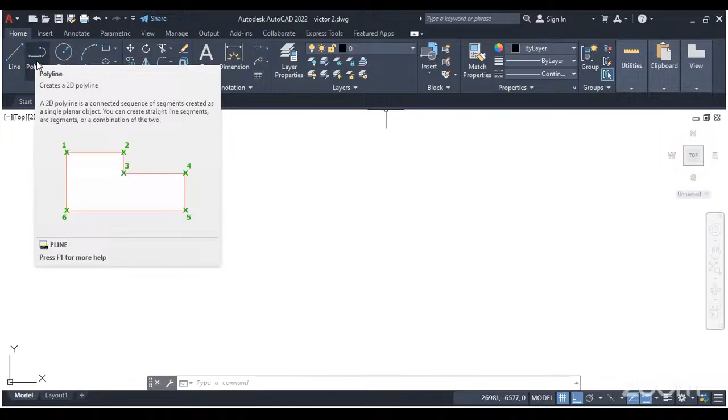After that we have what we call our ribbon. If you recall from our last class, starting from this drawing panel down to this view, they are all our ribbons, but now being broken into different panels. We have the draw panel, the modify panel, the annotation panel, the layers panel, and the rest of it.

Then we moved to what we call viewport controls, the view control, and the visual style controls. The viewport, if you leave your mouse around it, the definition will pop out for you. It says it provides access to multiple viewport configurations, several viewport tools, and the display options of the current viewport in a layout. Simply put, it gives you several positions for you to view your screen.

So you can have double screen, more than 2, 3 screens, or 4 screens. So we can try it. Click on it, then go to viewport configuration list, where you can see 2 vertical, because we are on single. You have 2 vertical, 2 horizontal, 3 rights, and the rest of it. So you can click on any one you want.

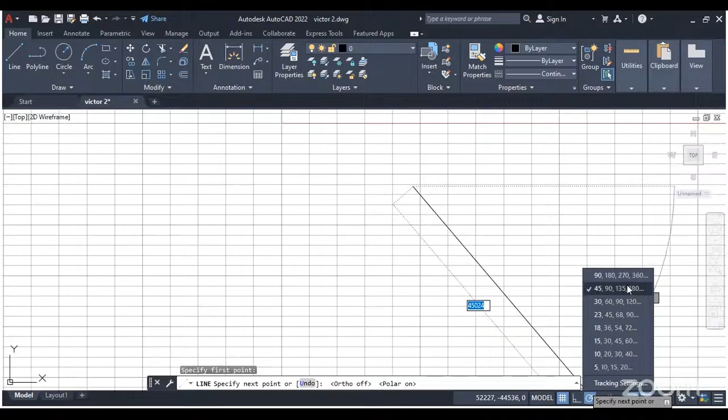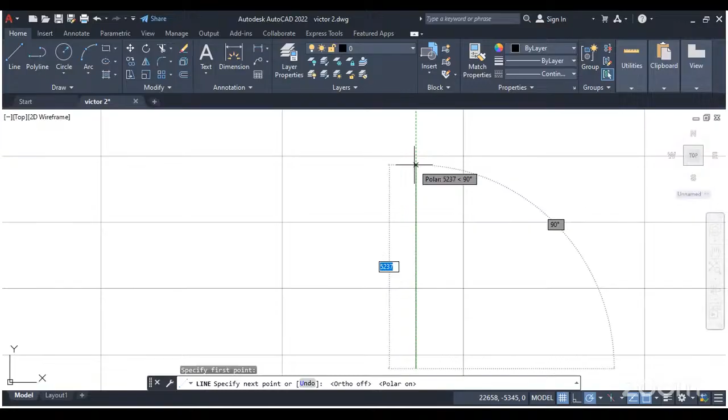Okay, let me turn it on. If I turn it on and move my angle to 45 degrees, you can see it. Let me zoom out so you see it properly. You see this other side is tracking it at 135, and you check, you see 135. The track is also tracked at 90. This is 180, it tracks at 135, it tracks at 90 degrees. When it's tracking, you see the green dotted lines. You can see the green dotted lines at it, and if you check the angle, you see it at 90 degrees. So that's for your polar tracking. Once it's turned on, it will be activated.

We also have what we call isometric drafting. This is used to change the position of your grid lines. If you turn it on, you see...

Oh, can you guys hear me? The time is 9 o'clock p.m. Can everyone hear me? Yes, we can hear you. We can hear you. Okay.

So if you turn it on, you see the grid line, when the direction of the grid line has changed, it also has a different direction. This is how this one is. So that's for your isometric drafting.

Then we have object snap tracking and object snap. The two of them actually work hand in hand. The object snap tracking is used to track the object snap. So now what is object snap? Object snaps are kind of endpoints or different points in an object. You can see we have endpoints, midpoint, center, geometric center, quadrant of a circle, intersection, extension. So these are different points of an object which can be snapped using object snap.

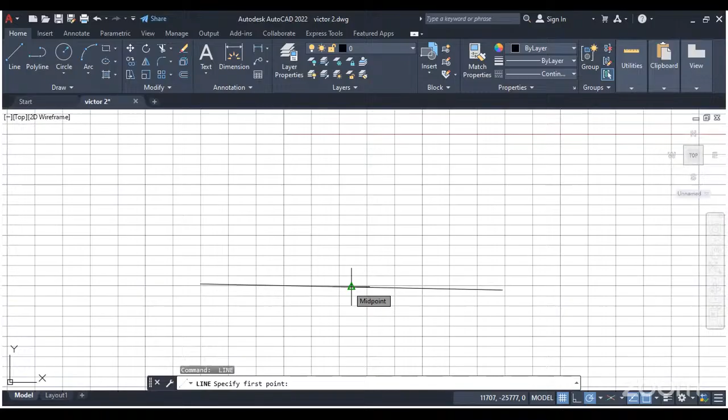Now the object snap tracking. This point that I have snapped, I can track it. I can trace it to another direction. Once I snap it like this, I can trace it to another direction and draw something else at that particular point. So that is what the object snap tracking does - it tracks the object snap.

Okay, I hope you understand the difference. Then we have line weight, which shows the thickness of a line. If I was to activate it, a line of 100, and this is not turned on, no matter how I increase the thickness of the line, it will also not show.

Until this line weight is turned on, the thickness will still be neutral like this. Then we have what we call workspace switching, which is used to switch from your 2D drafting and annotation to 3D modeling. And then this is your customization. So everything here can be customized. Everything showing here are the ones that are being ticked, so if there are ones that are not necessary, you untick it. Not as if they are not important, but it's just going to be too much around here.

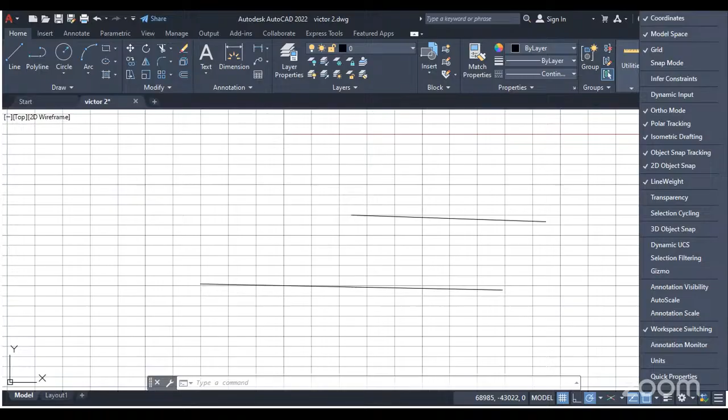Okay, so that is basically what we're being taught on Monday. And then we treated some examples. And we talked about our drawing tools. We talked about the line tool, the polyline, the circle, and the arc, the rectangle, and the polygon.

I think that was where we stopped in our last class, whereby our line tool says once you activate it, specify your first points. Remember what I said, that your command bar shows you step by step on what to do. It tells you what to do after activating a command. Now I've activated my line command, and now it's telling me to specify my first point.

So I can specify any point of my choice, and automatically it will tell me what's next to do, which is to specify my next point. So I specify my next point, and it will still continue telling me to specify until I'm done. When I'm done specifying, I will just have to click on escape.

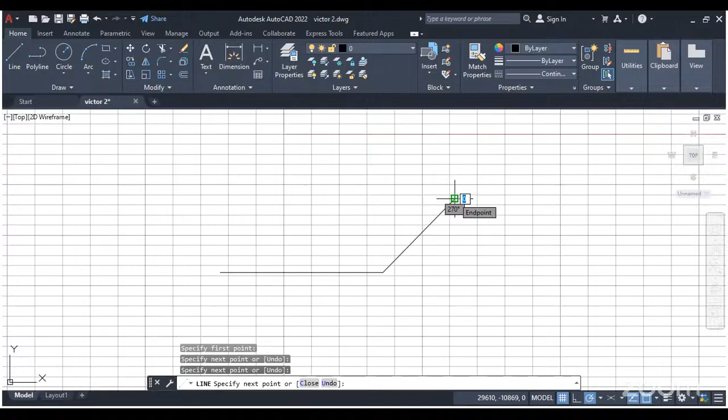Then we talked about our polyline, which is the same as our line tool. The only difference is the different entities. Like if I should draw a line like this and I escape, you notice that the lines are separate entities. It can be highlighted or edited one after the other. But the polyline now, they are together. That's the difference between the polyline and the line tool.

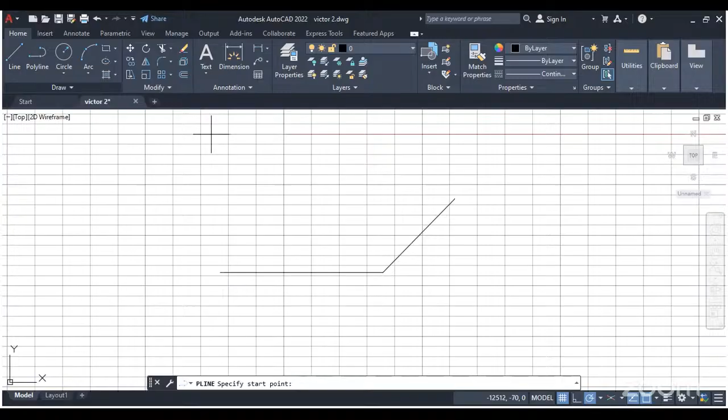Then we treated on circle, whereby we have different ways and different patterns of drawing your circle. You have your center radius, you have your center diameter, you have 2 points, and you have 3 points. So I think we treated on center radius. So depending on what parameters were given to you, if you are given the center of a circle and the radius of a circle, you can go ahead and use center radius.

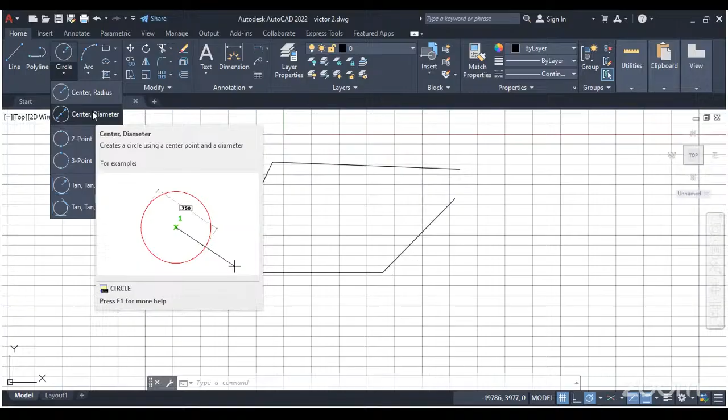If you are given the center of a circle and the diameter of a circle, you can go ahead and use center diameter. If you're just given 2 points directions, let's say for instance they said you should use this point and this point to create a circle, you can go ahead and use 2 points. So let's just use one of it. Let's say we have 2 points. So you click on the first point, click on the second point, and automatically we've created our circle.

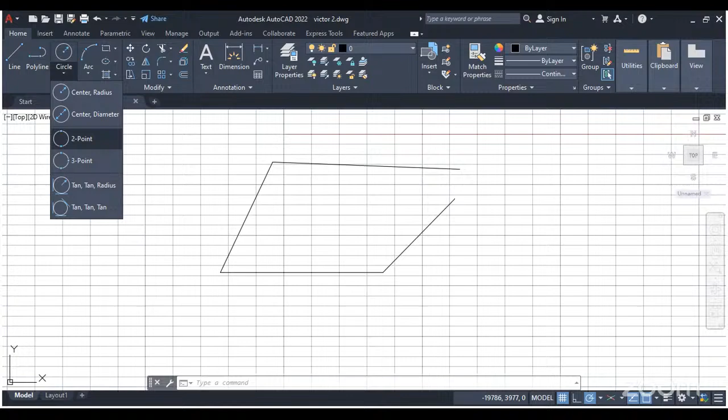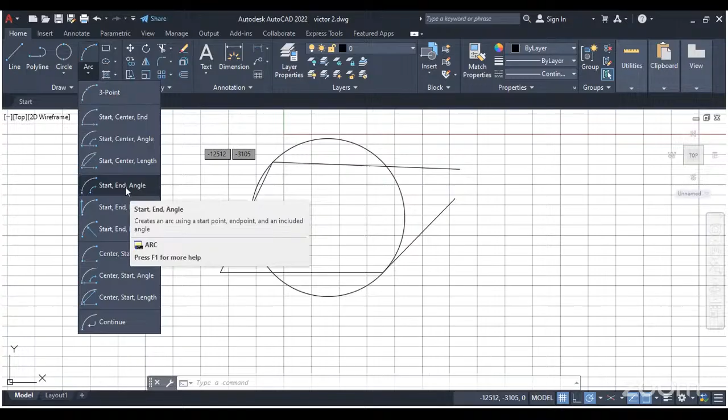Then we move to our arc. Still the same, we have different ways of drawing our arc. We have the 3 points arc. We have start center end, start center angle, start center length, start end angle, start end direction, start end radius, start center, start end, center start angle, and the rest of it. It just depends, like I said, on the parameters given to you.

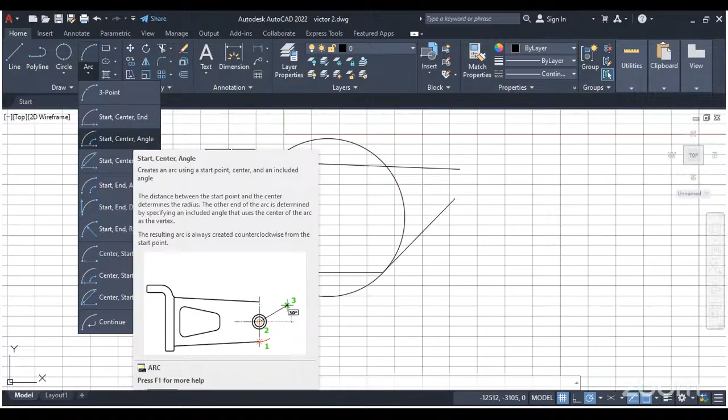Now let's use the start center angle. Let's just say this is our starting point. Remember, follow your command bar. It says specify your start point of arc. Let's say this is our start point.

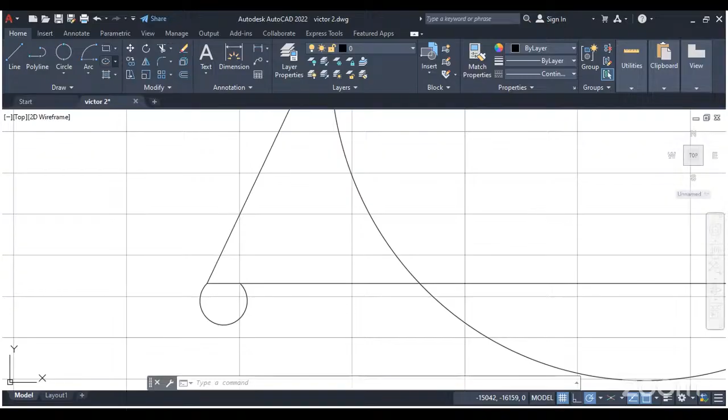Then we also treated rectangle and polygon. We treated rectangle. Once you click on it, it says specify the first corner point. You specify any corner point, specify the second corner point, and automatically you've drawn your rectangle.

So then we treated polygon. Now we have 2 types of polygon: the inscribed polygon and the circumscribed polygon. So if you leave your cursor, the definition will pop out. It says you create an equilateral closed polyline. You can specify the different parameters of the polygon, including the number of sides, the difference between the inscribed and circumscribed options is shown. So the inscribed now is the polygon that is inside the circle, meaning in, with the word inscribed.

The inscribed polygon is inside the circle, and the circumscribed polygon is outside. But they are both the same numbers used to create them. So if we use a radius of 20 for both, the difference will be shown.

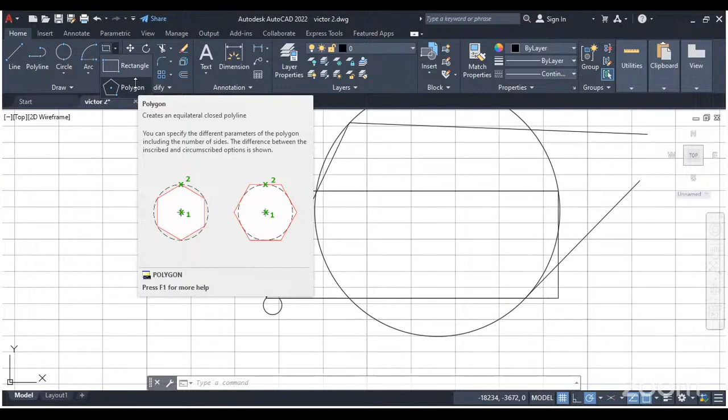So let's try it. Let's replicate what is shown here. We draw two different circles.

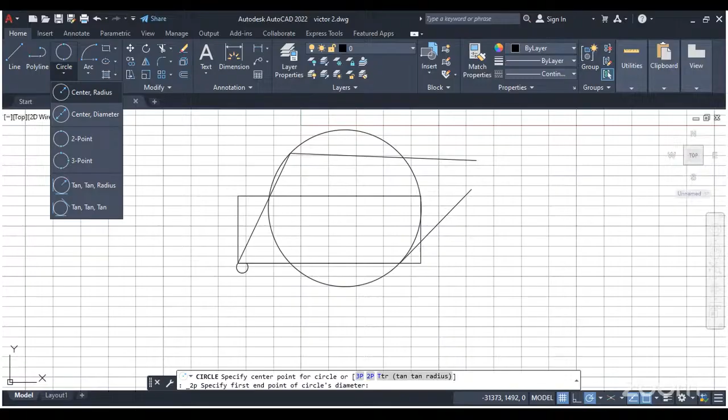Let's use center radius to draw this, since we are working on radius. We specify our center and then our radius. Let's say our radius is 4,500, then press enter. This is the first circle. Then for the second circle, still using center radius, specify your first point and the radius as 4,500, then press enter. So these are two different circles with the same radius.

Now we go to our polygon and activate it. Once activated, the first thing in the command bar is polygon, enter number of sides. Let's say 8, and we press enter. Now it says specify center of the polygon, and we are going to use the center of our circle as the center of our polygon.

Then you click on it. The next option asks if you want it inscribed or circumscribed. We go with the first option, inscribed. Now the next thing is to specify radius of the circle.

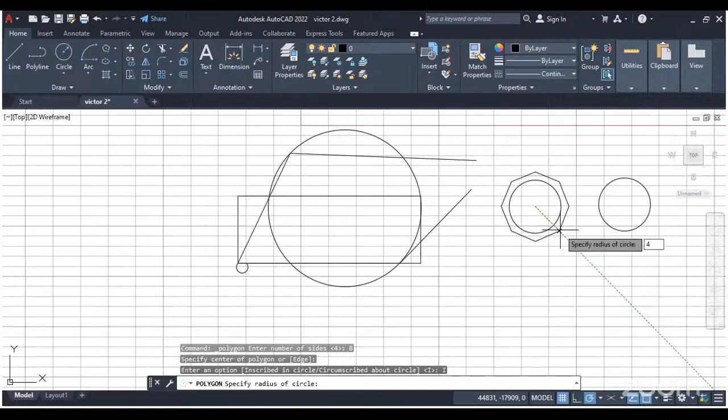Remember, we used 4,500 radius to draw our circle, so that's the same radius we use. 4,500, then press enter. So you can see we activated the inscribed polygon, and the polygon is inside the circle using the same radius. Now let's still use the same radius to activate the circumscribed polygon.

The first thing after activating is to select the number of sides. It's 8, you press enter. For center, you use the center of the circle. Remember, the center appeared automatically because the object snap is turned on, and the center of a circle is being activated.

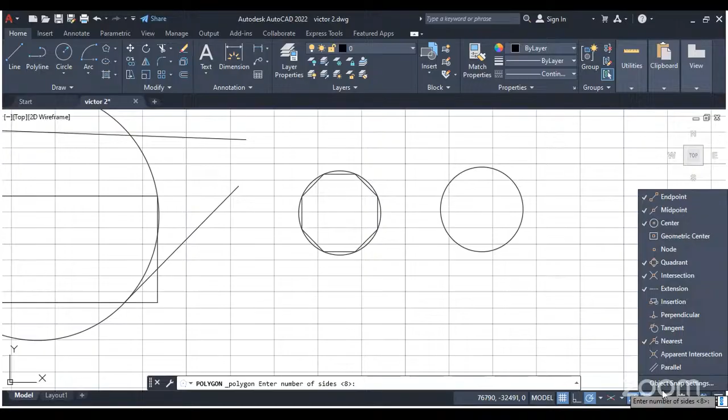If I turn this off, even if object snap is on but I turn the center snap off and activate my command, I will look for the center, revolving around this circle, and it won't show. I will then start doing calculations about it. So I have to turn the center on, and my object snap has to be on. Now you see the function of object snap—it's so easy to get the center of a circle, the quadrant of a circle, and the rest. Very, very easy.

Once I revolve, I activate my sides first, then specify. I haven't specified the center yet, let's start again. Activate my sides. Once I revolve around it, automatically the sign of center will show. If I move close to it, you see it's the center. So I specify my center as the center. Then we use circumscribed, and specify radius of circle, which is 4,500, then press enter.

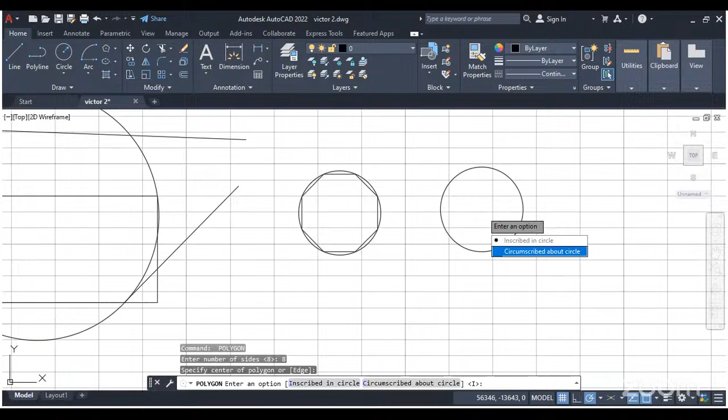Now you see it—the polygon is outside the circle, which is circumscribed. I hope that was pretty clear.

Now we move on to center ellipse. We have different ways of drawing our ellipse, just as we have different ways of drawing an arc or a circle. Using your center, you can draw your ellipse, or using axis endpoints. Then we have something different, which is the elliptical arc—it's an arc but in the shape of an ellipse. So we are going to try the center method and the elliptical arc.

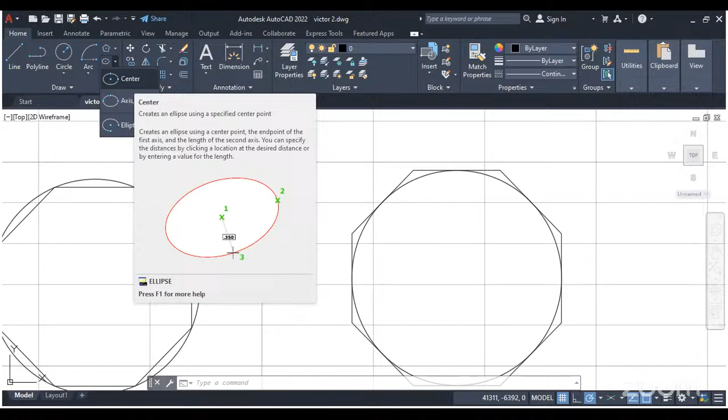So it says create an ellipse using a specified center point. Clicking on it, select and specify the center of the ellipse. Let's say this is our center. Select the endpoint—this is our endpoint, and then the distance, which shows the shape of it. Let's just leave it here. You have automatically drawn our ellipse.

Now, using the elliptical arc, you activate it. It says specify axis endpoints.

Okay, you can specify any point as you ask, except when you've been given a specific instruction. So you specified the first axis points. Now it says specify the other endpoint. Let's say these are the other endpoints.

Now the distance, which is the shape of the ellipse. This is our shape. Now it says specify the angle. From where do you want to cut it from? Let's say we are cutting it from here.

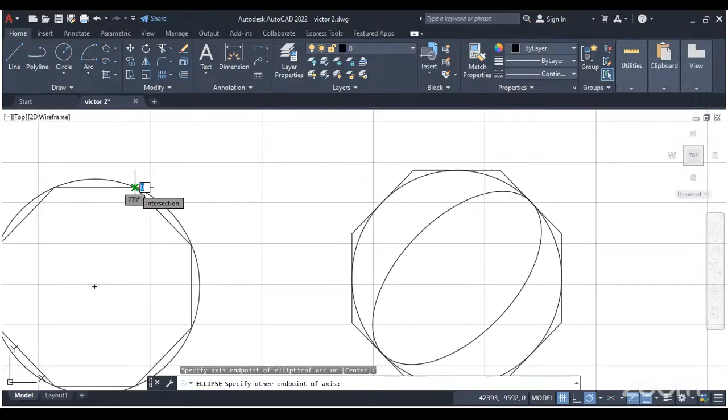If you can see the screen well, you see that you started cutting it from here. And once it gets here, it can't be a full ellipse. It has to be half because it's an arc, and an arc is not a full circle. So once you drop it, depending on where you are, let's say we are dropping it here. And then this is our ellipse, elliptical arc rather. Elliptical arc.

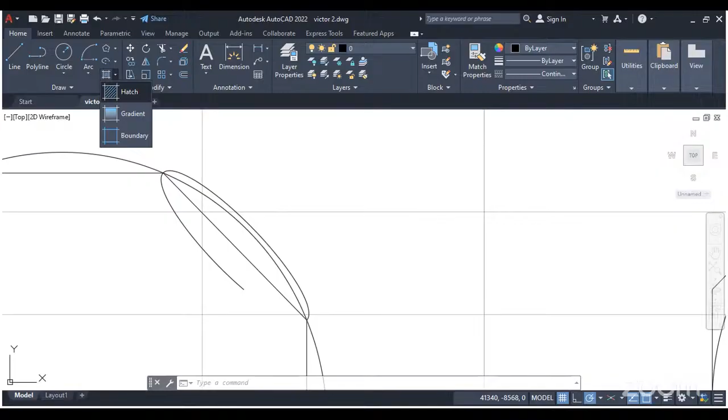Then we have, if you click on the arrow beside the last command on our draw panel, what we call the hatch tool, gradient tool, and our boundary. If you move your mouse towards the command, the definition pops out, which states it fills an enclosed area or selected object with a hatch pattern or fill.

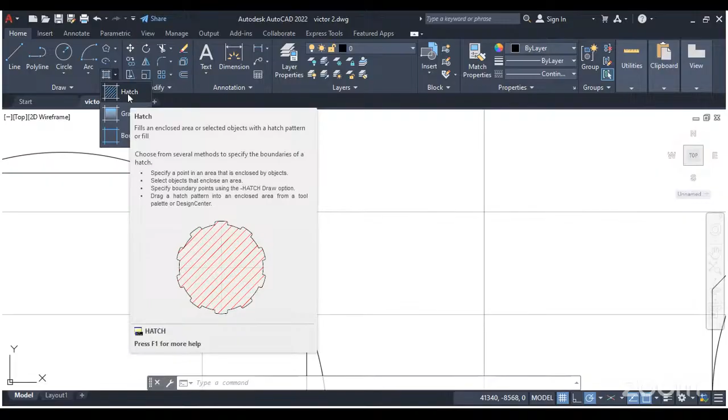Take note of the enclosed area. It means that as this area is enclosed, it will fill it with a hatch pattern. Okay, so once we activate it, as you activate it, you see where they wrote pattern, and you click on the arrow under it.

You'll be able to get a difference of patterns. This is where architects and civil engineers get most of their designs from, like the wall, block work, and you can see this is looking like a block wall. And then we also have the design of a roof. So this is where you can get all that from. Depending on what you want, since we are just practicing, you can just click on the colors.

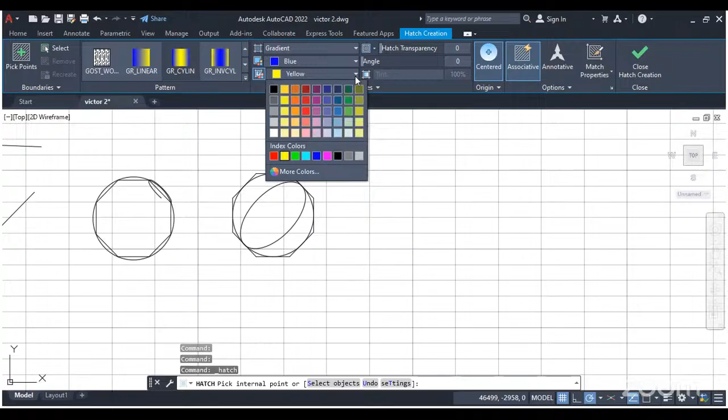Now let's use this color. And then under the properties, you can still edit whatever you've chosen. So this is blue color mixing with yellow. You can actually change it, say to yellow and red, or any different color, just click on the arrow. Click on this arrow to change the first color, and click on the second arrow to change the second color. Or if you just want one color, not two colors mixed, you just want it to be blue, you can change the yellow to blue. Then the transparency, if it's too thin, you can increase it, and the rest of it.

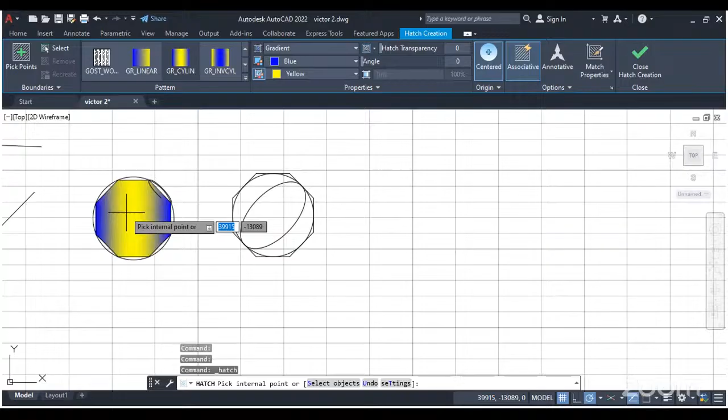So after activating it, then you go to the enclosed area. Now you see this is enclosed, that is why it's showing here. This other side is also enclosed. But this half arc only here, you see it's covered the full polygon. Only this arc, from this point where my arrow is down to this point, it's not enclosed, so it will not activate.

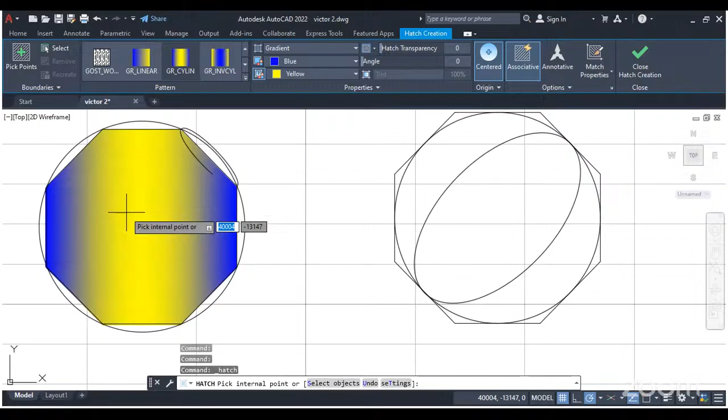Or let's say this particular place where this line and this line is, I want to activate it from here. If I click on it, it will not activate, as the color isn't even showing that I'm revolving around it, to tell you that it is not enclosed. But if I revolve around here, you see the color is showing, meaning that that particular place is enclosed. Here is enclosed, here is enclosed.

So once you've gotten the one that suits your prescription, you just have to click on it, meaning you have activated it. Once you click on it, you click on Close Hatch Creation, or you click on your escape tool. Now that is for your hatch tool.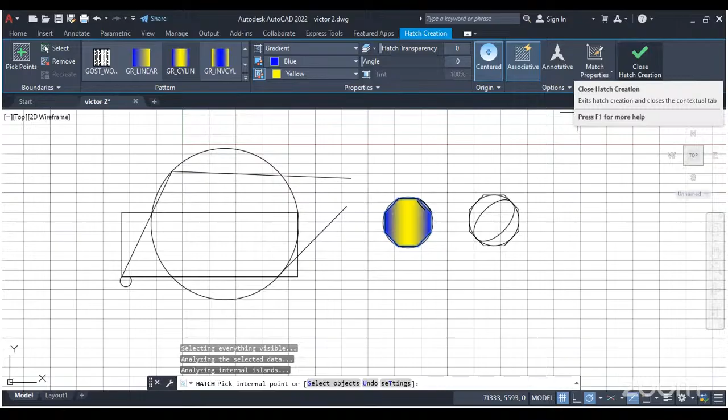Then we have the gradient tool. They both have the same function: it fills an enclosed area or selected object with a gradient fill. That one is hatch fill, this is gradient fill. It has the same properties, actually the same patterns, most of them are the same. So whatever you can't find in hatch, you find in gradients. You have the gravel here, you have grass, and the rest of it.

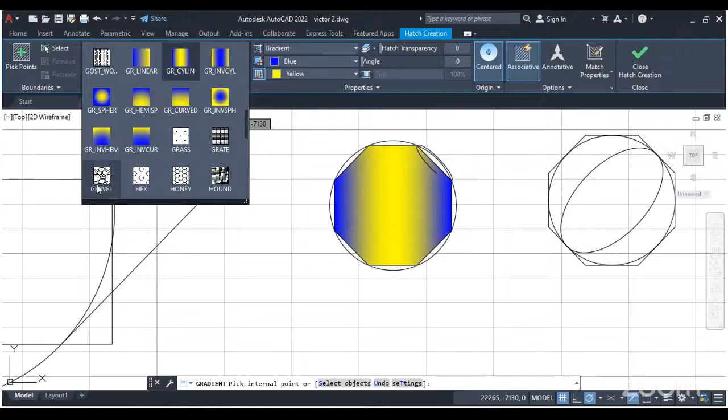Clicking on it and click on an enclosed area and press on it, then press escape or close hatch creation, and automatically it has been activated.

Now the last command on your draw panel is your boundary, what we call boundary. It creates a region or a polyline from an enclosed area.

Remember what polylines are, right? Polylines are like lines, but the difference is that they are connected together. So that is what it means here - it creates a polyline, meaning if you have different lines joined together, but they are just like you use a line to draw a square.

Let's use a line to draw a square now. Let me turn on my ortho mode and use a line to draw a rectangle or square thereabouts. You see how I just tracked my endpoint to get this point. Let me Control Z it. I'm trying to make sure this line is at the same point to this one. I just moved to where the snap is, which is the end point, and tracked it towards my other angle.

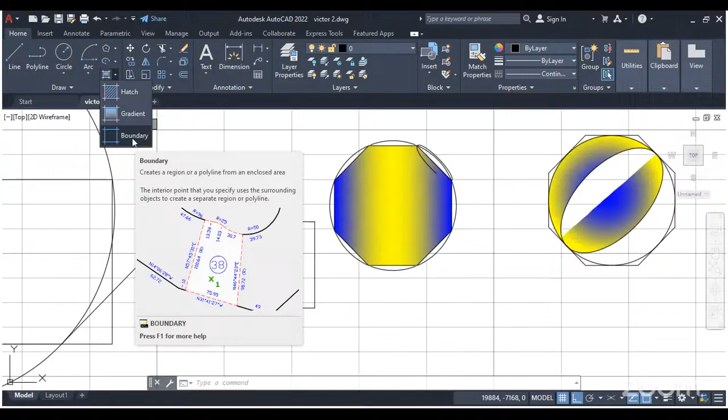So activating the boundary now, it asks object type - do you want it to be a polyline or a region? You click on polyline and click OK. Now it says pick internal point, so this is my internal point. I click on it and then press - as I click on it, you see the corners were highlighted. So I just have to press enter, and it says boundary created one polyline.

Now let's go and highlight it. So you see, I just highlighted one of the lines and the whole lines were highlighted together. So automatically this has converted to what - a polyline. Look at it, polyline. So that is the function of your boundary.

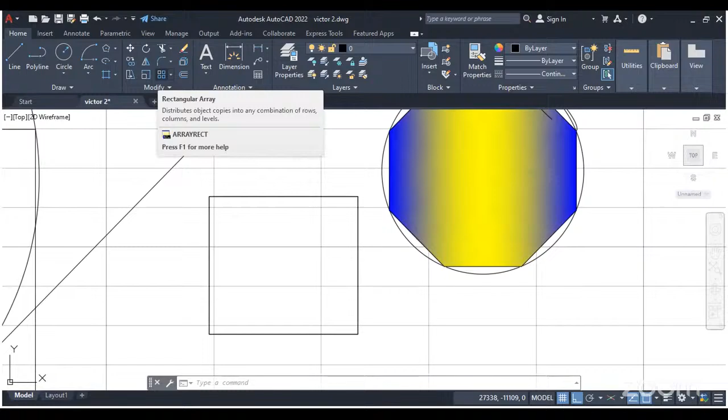Now, in our next class, which is on Friday, we treat on our modification tools, modify tool, which is also known as editing tool. So all the commands we've been able to understand in our draw panel: the line, the polyline, the circle, the arc, the rectangle, polygon, ellipse, and the hatch, gradient, and boundary.

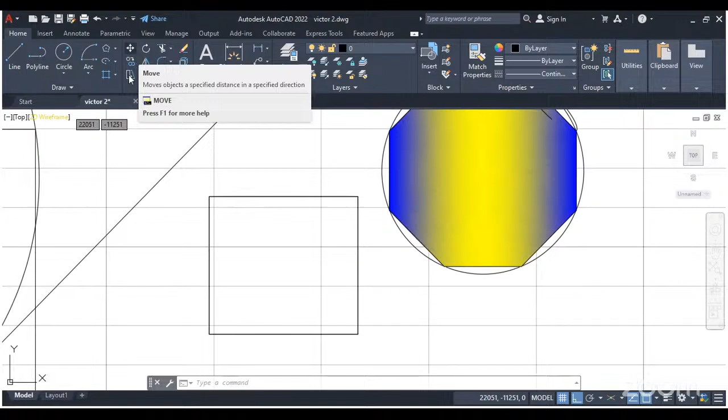All those commands can be edited using your modify tool. So in your modify tool, we have move, copy, stretch, rotate, mirror, scale, trim - in the trim you have trim and extend. You have fillet, chamfer, and blend curve. We have arrays: rectangular array, path array, polar array. We have erase tool, explode, and offset. So we are going to treat all that on Friday.

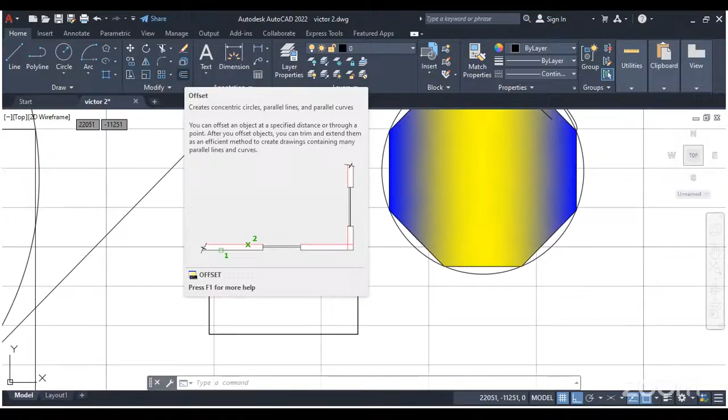Now let's try some examples. I hope everyone can hear me. I was not talking to myself all this while.

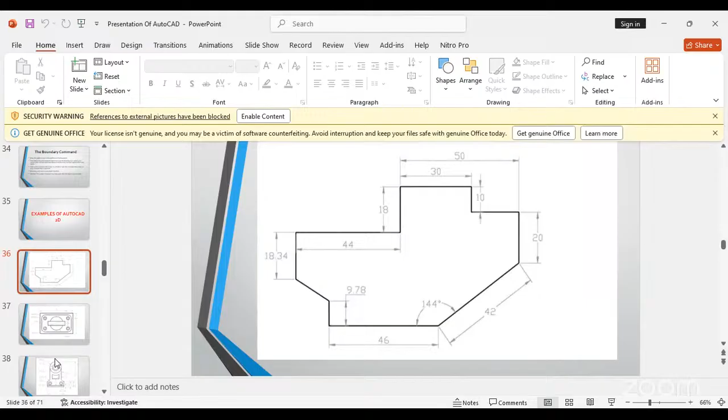Okay, we have our first example. Please, if you can take a screenshot of it, let's try it. We have 46 going to 42, 20, 10, 50, 30, 18. Now, if you have taken a screenshot of it, hope you can see the screen, hope you all can see my screen.

Okay, going back to our AutoCAD. I'm sure everyone can see my screen now, and I'm sure everyone has screenshotted the example we are going to try now. Now, activating your command, your line command, let's take the first step, which is the distance is 46.

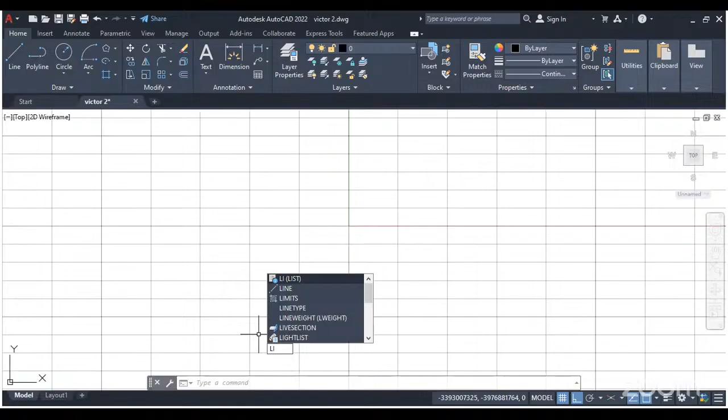Now, after creating your units, you just have to type to show your drawing limit. So you type limit, LI. Look at the limit there.

So once you click on LI limit, it says specify lower left corner. So your lower left corner is your origin, which is 0,0. After pressing that, you press enter. Then to activate the next command, it asks you to specify upper right corner. Now the right corner depends on what you are to draw.

If you check the example we are to start with, the highest value there is 50. 50 is the highest. So we have to use 50, or let's just use 60 instead. So 60, 60, and press enter.

So after specifying this, you just go to your zoom extent and zoom it to its maximum. Once you click on it, you see I've zoomed my workspace to its maximum. If you check the coordinates, drawing coordinates, you see there it is 64.3.

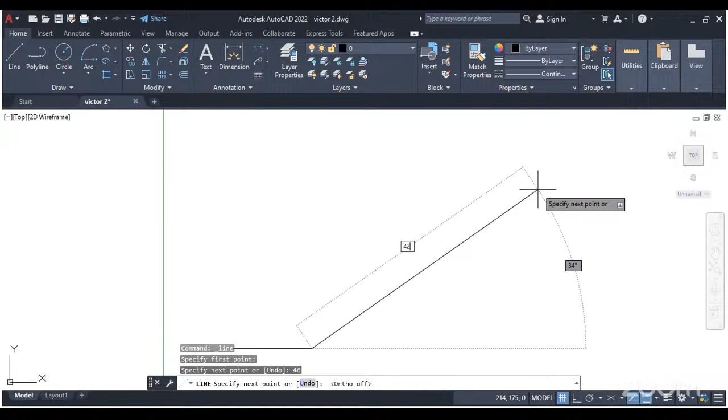Now this box that is being highlighted is for the length. You type in your length, which is 42. We have typed in the length. Now to type your degree, which is the other box at the other side, you just click on your tab and automatically your degree box is highlighted. Now you put in the degree or the angle, which is 144. Then you press enter. Now you see, is that 144? 144 is the degree.

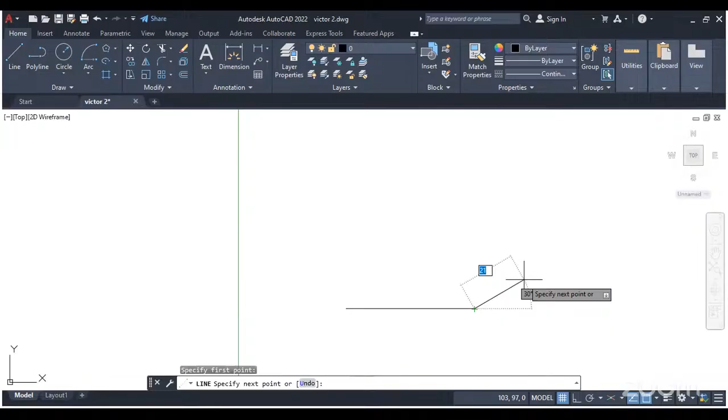Okay, the 144 is the opposite of it. So let's use our length of 42 and then let's use a degree of 45 instead. Then we'll press enter.

Now the next one, you can turn on the ortho mode. Next is your distance of 20. Distance of 20, and you press enter. You move again to a distance. Now the full distance is 50 and the other one is 30. Automatically it will be 50 minus 30, which is 20. Now type in your 20, you press enter.

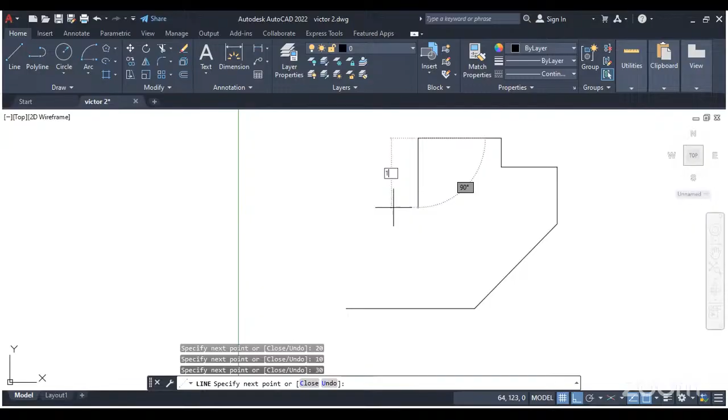Going up, the height is 10. You press enter. The other side is 30. Press enter. You come down to 18. You press enter. Come down to 44. Press enter. Come down to 18.34. Press enter. Then we also have a slant again. F8 to change to ortho mode.

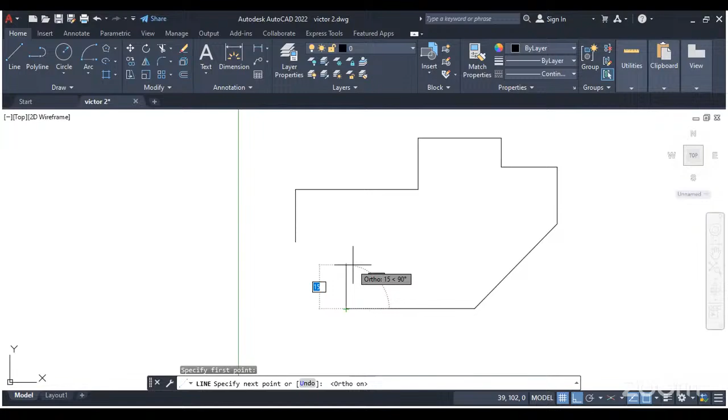We have another slant again. But before the slant, let's just start from here instead. Go to your line command and start from here and use F8. Then the distance is 9.78. Press enter. Then you can now slant it towards this other side. Make it seamless. So automatically, you've been able to get this easy peasy.

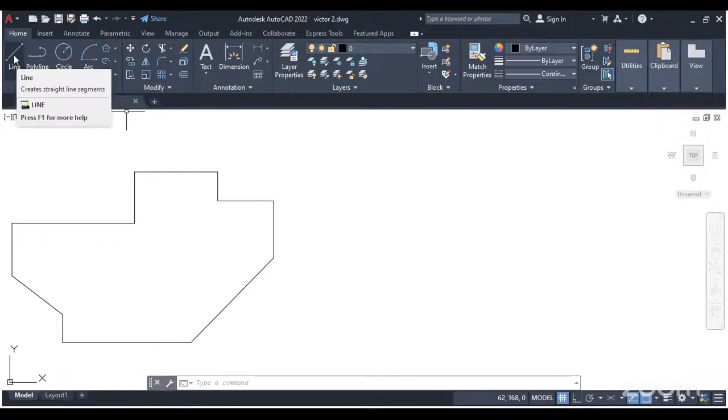If you click on the line tool, you draw the first, this other side, F8 for ortho mode. You draw this other side, which is 6. You type your 6 and press enter.

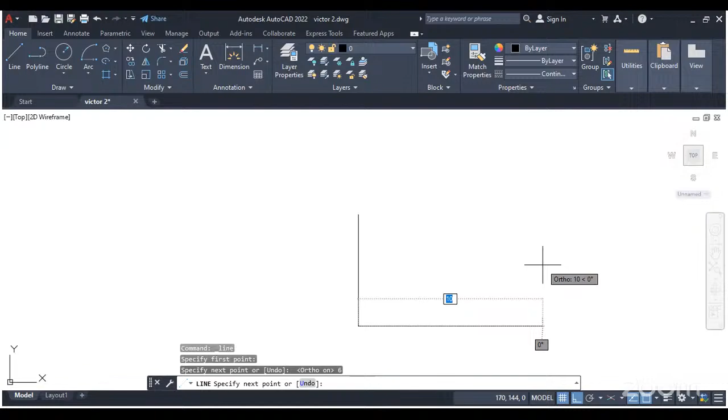Now you see 6 is tiny because the drawing limit we set for that other one was 60, and we are using 6. You can see that's the reason why it was tiny. So you just have to zoom it in, but it's not too far from it. That's why we still have to continue, just have to zoom it in.

And then you move, the length of this other one is 10. Type in your 10, press enter, and then it's a square.

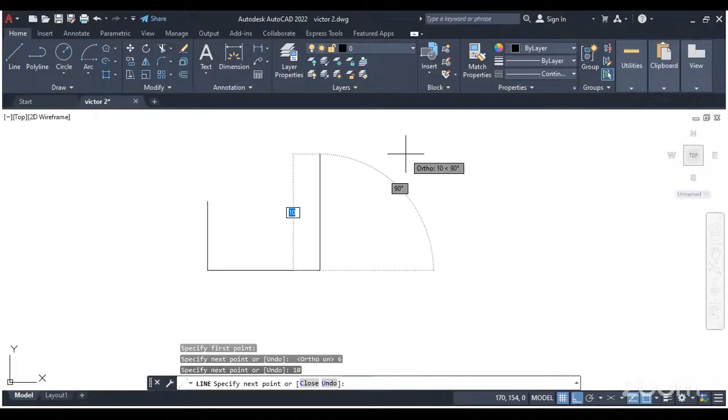It's a square, yes. So it's still going to be 6 here, and 10 here. So either you type the 10 or you just activate it. See, even in the box, it's being highlighted 10. So you just activate it and press enter. So we have drawn our square.

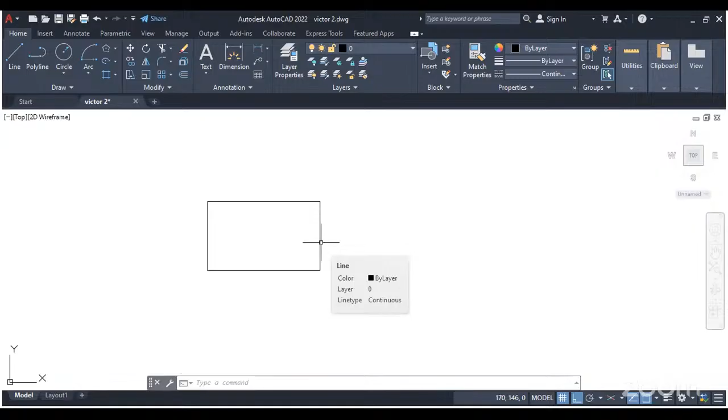Now what we have to draw is the one in between it. First off, the distance from here to the next one. There's something here that if we are supposed to treat on Friday, but we'll just have to work on it. I'll just recap on it, then on Friday we talk about it more, which is the fillet tool. Or you can use, okay, we'll use polyline instead. Now back to what I was saying.

From this line, the distance between this line and the next line is 0.5. Now you just have to create and type in 0.5 and press enter. So now this is the distance.

And again, we're not given, we just cut it short. From here to here is 6, so half of 6 is 3, right? So we start our line from this half here and connect it to this place so that we can have a distance.

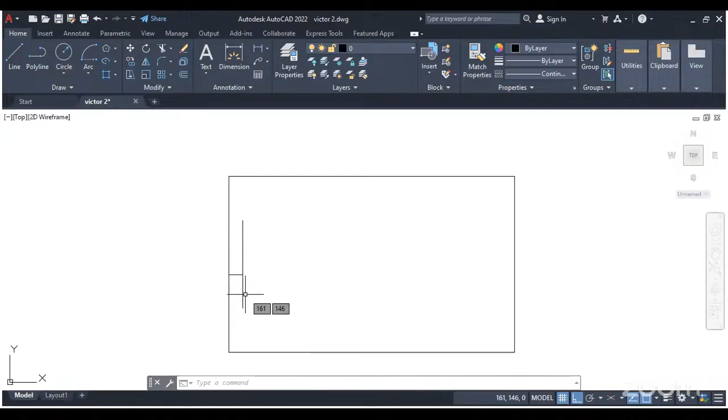So we've gotten this other line. The other side of it, still the same thing. We are still going to use 0.5 as the distance between it. We go to click on 0.5 as the distance and press enter.

After pressing enter, you see, activate your line. And from here to here is 5, right? Wait, it's 10, so the midpoint is 5. Let's say we use 2.5 and 2.5.

2.5. Then we activate the line command again, starting from the end point and still use 2.5. Press enter.

Okay, I think this other one is more far from it. Let's increase this other one to 3.5. Yes, 3.5. So let's use 3.5 or 4.

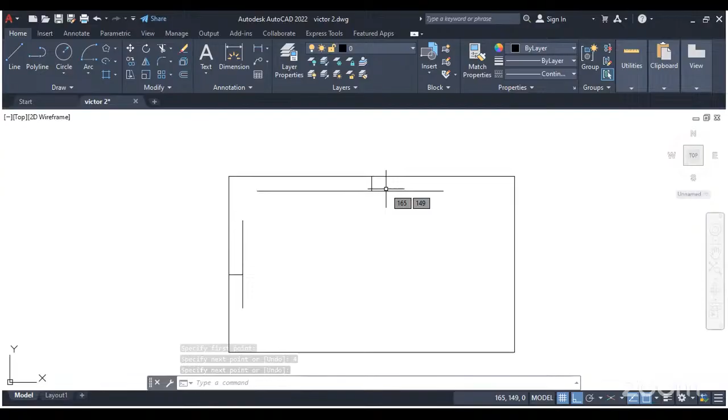Then we use here 4 again. Let's use 3.5 and see the difference between the two of them. Okay, we're going to use 3.5, 3.5. Enter. So we have gotten this other side.

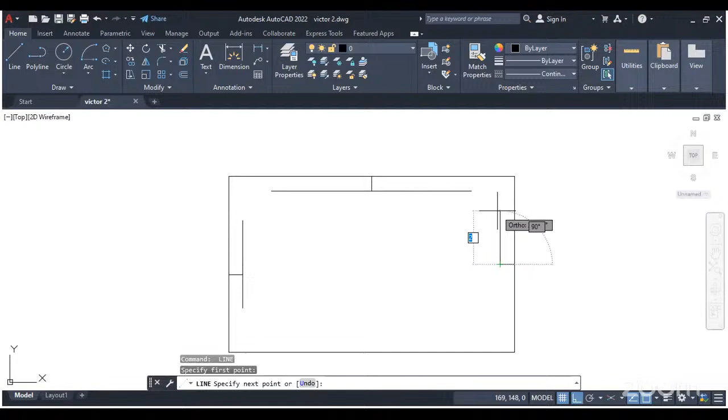You do the same thing for this other side, just like that. You go to your line, 0.5, that's the distance. You go to your line and use, this time around we use 1.5, let's use 2. Enter. We use 2, enter. We do the same thing here.

We should have used a shortcut, but since we've not treated that, we just use what you've already learned. Then go here, which is 3.5, 3.5, then 3.5. Then this other one, we use 2, let's use 2 instead.

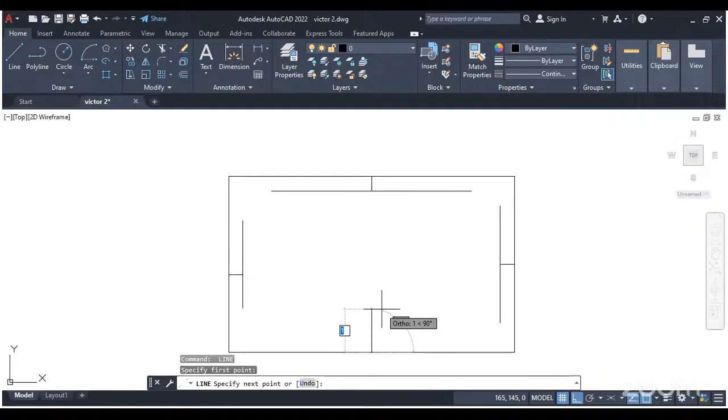Activate our line, use 2, then we use 2, typing it. Now we can go ahead and delete this reference line. Remember, this was our reference line for us to get the distance between the two lines. Go ahead and delete it.

So we deleted our reference line. Now it's for us to draw the arc. Let's use our arc. They gave us diameter, which is diameter 1.

Okay, so clicking, let's use start, end, radius. Then specify our starting point, specify the end point, and now specify the radius. You know the radius here is 1, right? You check the drawing, the radius is 1, so you type in your 1 and press enter.

Let's try it again. Specify start point. And if your direction is changing like this, press your control key to change the direction. Then you put in 1.

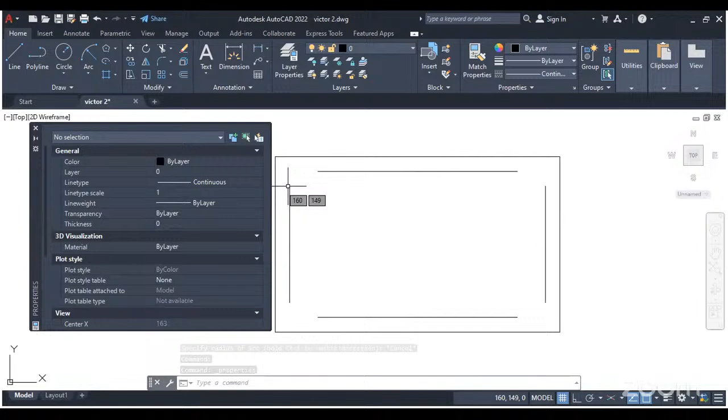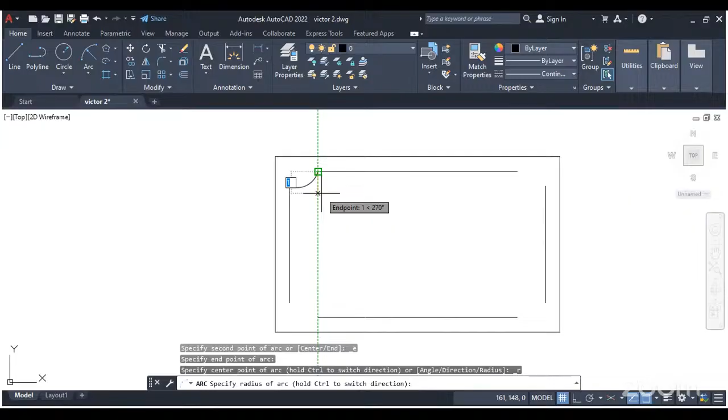You type in the 1. You just have to correct it.

Then you continue using your arc and do the same thing here, from here to here, and then your radius is 1. You do the same thing for this other side, here, here, and then your radius is 1.

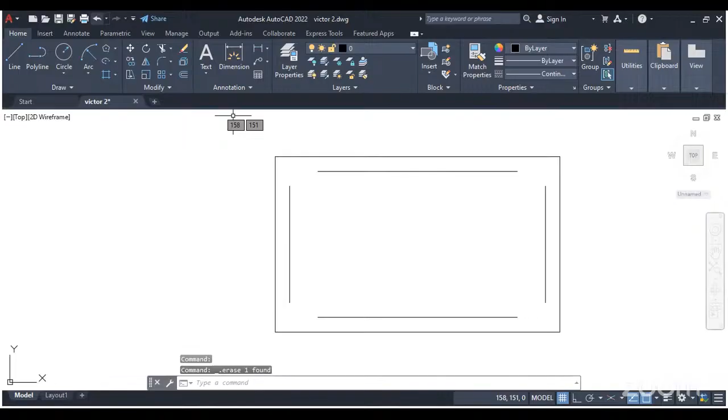You should have just used fillet to fillet that. But since we've not treated fillet yet, you just have to work with what we've covered.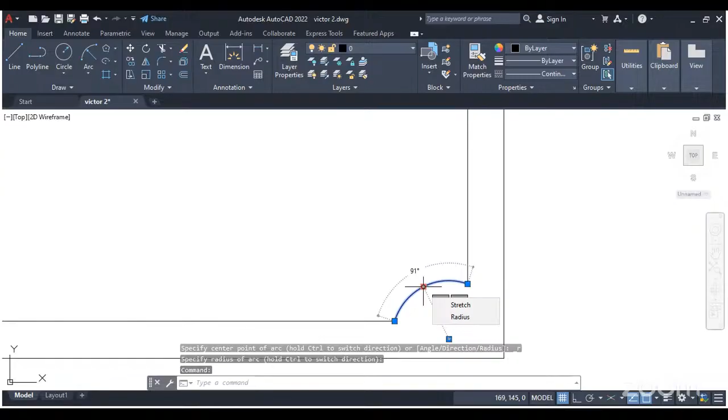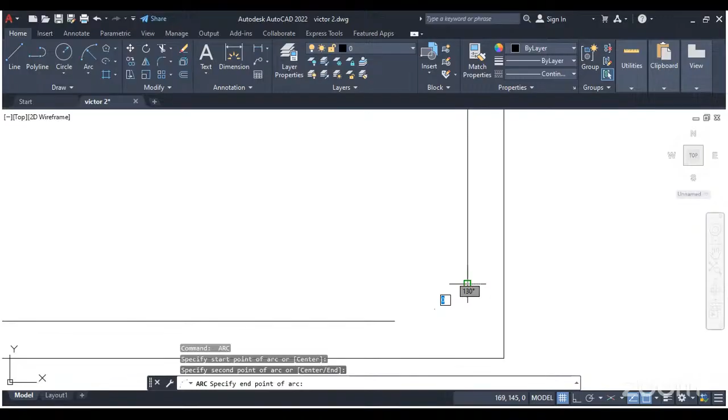I think this is mostly used. Let's just use our start and our 3 points. Get that: our first point, second point, and then the last point, which is 1.

You can just edit this. Edit it to get our desired point. Edit it again. This is better.

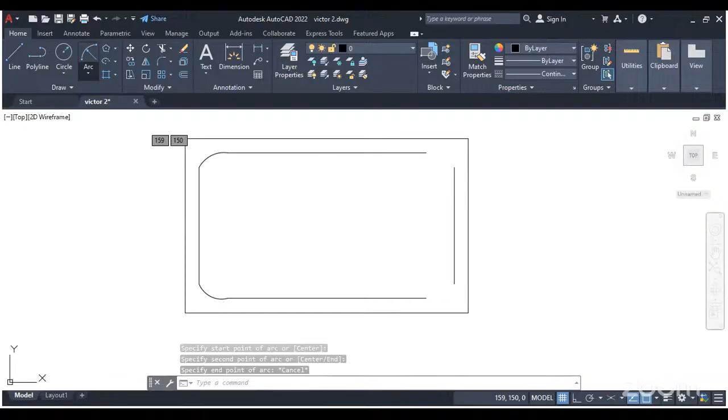Now we do the same thing for this side. We're going to still do this particular example using our fillet on Friday. We're going to still use the same example to fit our fillets when we're talking about fillets in the modification tool.

So we just maneuvered our way in getting this because the way we used was the fillet, like I said. So we are going to do this again.

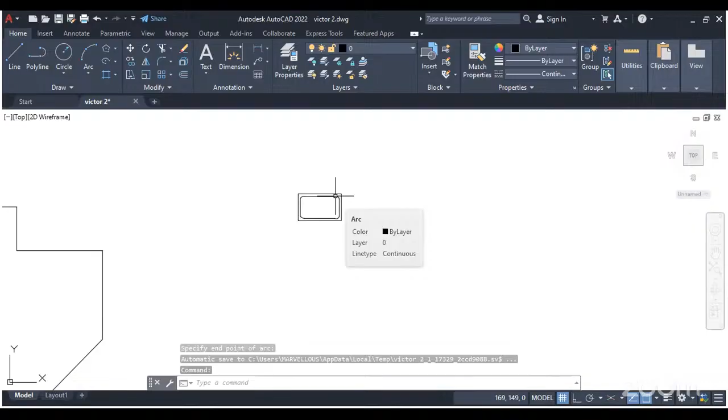Now the next thing to work with is the circles, with a radius of 1. Now we are going to use center diameter to get our circle. Now the first circle there is 0.6, 0.6.

Press enter. Then you activate your circle again, use the center, then the next one is 1. The diameter is 1. Sorry about that.

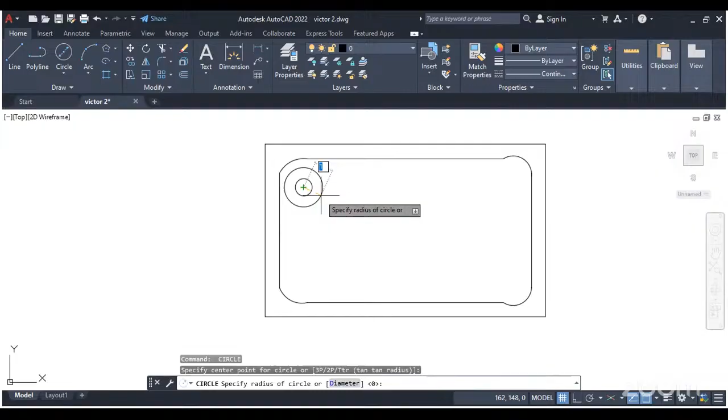Center diameter. Specify the diameter. Radius, which is 1. Exactly. So we do the same thing for the next one.

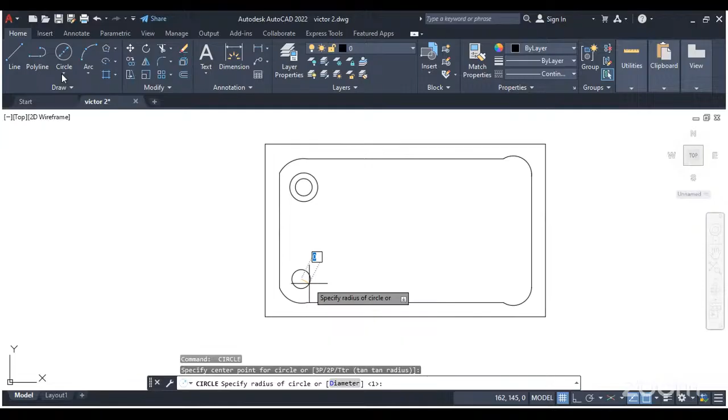For the center, we use 0.6, 0.6. Press enter. You go back again, specify the center, and use 1.

So you do the same thing for the other side. This is 0.6, 0.6. Enter. And use 1.

So we are going to adjust this because the arcs are not properly in the same shape. You do the same thing, use 0.6, 0.6, then you use 1. Then use 1.

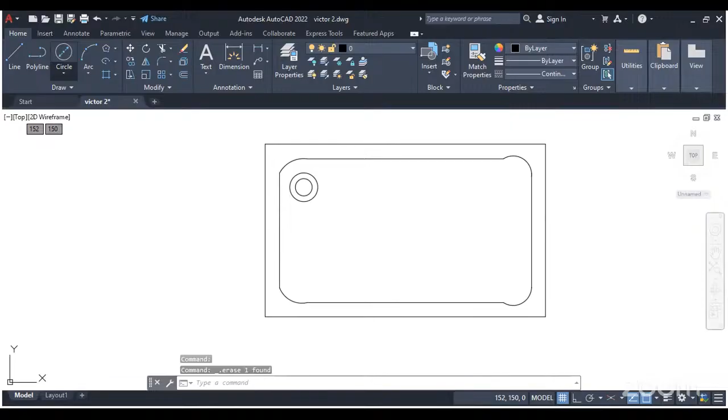After you've done that, then you draw the big circle. The big circle has a radius of 2. So we are going to use center radius.

Now we're going to track from the midpoint of this line and the midpoint of this line to get our center. Now you can see this is our center point of the 2 lines. You just click on there and then use radius of 2 and press enter.

So we have gotten a big circle, and then the rectangle, the last one. And we use the distance. The distance is 1.2.

So you can use rectangle or you use your polyline. The distance is 1.2. And then the height is 1.2 and the distance is 5.2.

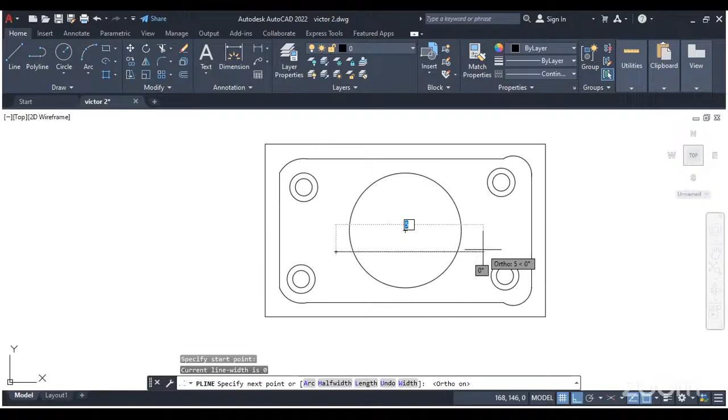Tracking this line, okay, this is the center. Activate here and then turn on your F8 and then you type in your 5.2. Press enter and the distance is 1.2.

You press enter. Do the same thing there. You track this and you track this. And you escape.

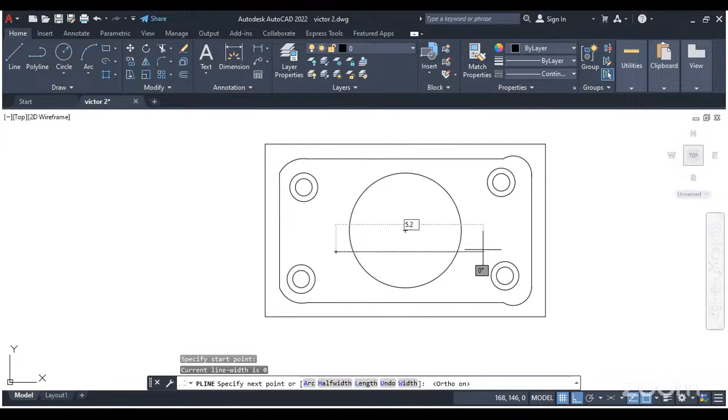So this is automatically what is being there. Then you trim out this place and this place. In our next class, we will use our fillets to get the shape of this arc very well, and then we use our trim tool in our modifying tool to trim out this space and this space.

So any question? Any question?

Now for your assignment, I hope you can see my screen. We'll try this as your assignment, like we treated in our last class. If you can't see your screen, you have to share that particular page.

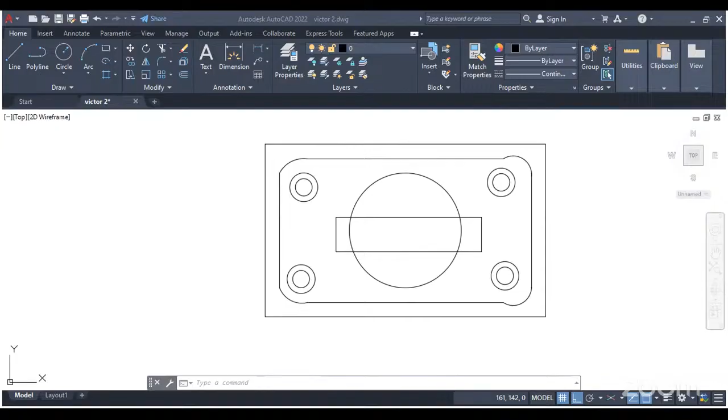I was asking earlier if you can see this. So we are going to redo what we just did in this class, and then we are going to try this also, and then redo this one and redo this one.

Have you taken a screenshot of this? I've taken screenshot of what we did, and then the screenshot of this one. If you are done taking screenshots, I would like to attend to questions and answer them.

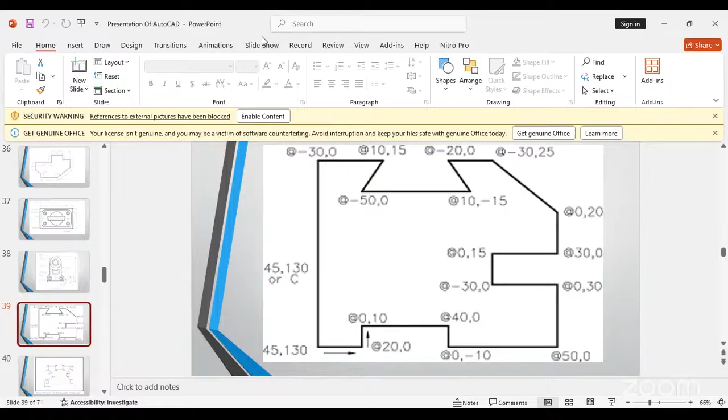So, do we have any question? I've checked the comment section, no question for now, but we'll leave that open for about 5 minutes after 10. If we don't get started in the next 2 minutes, we assume no one has a question. I feel what we addressed is good enough, very easy to understand. So if there's no question, I totally understand because you did justice to AutoCAD.